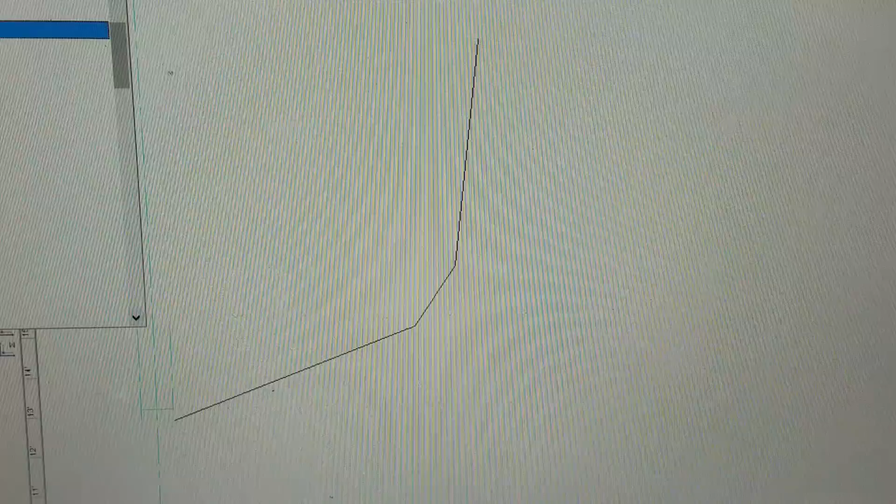That's the line that represents that frame that I built that was sort of out of position. Not out of plumb, but it just wasn't symmetrical and didn't give me the real dimensions I wanted. And so the dimension from here to here was off, which meant that that frame wouldn't sit right. The sheer would have been a little bit more in. There's only a 3-inch difference from the top of the sheer to the chine. So it's really important that I get this flare properly. So I wanted to show you frame 16.

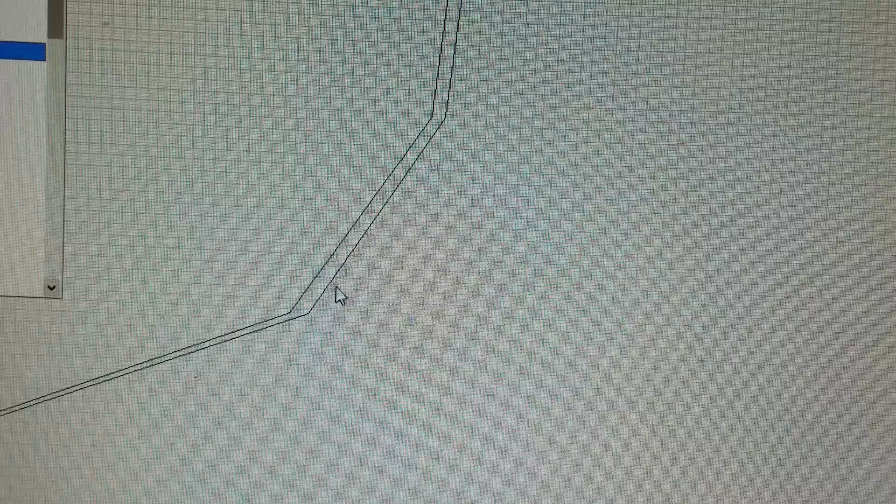All right. Now here is frame 17. You see, it is pretty similar, but it's different. And so it's longer here at the bottom of the boat. The angle is pretty similar, but it's a little different. And I wanted to show you that in a graphic way.

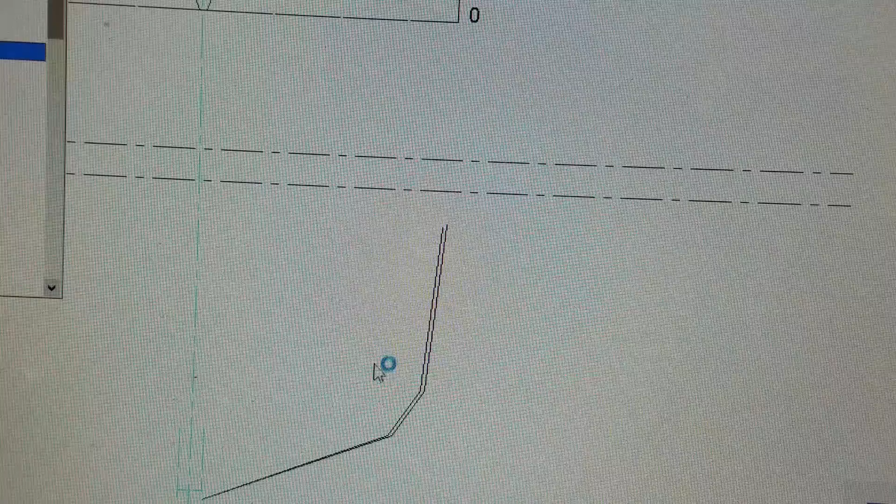It actually is taller, if you can see that here. Let me zoom out and zoom back in. It actually rises up longer. It rises higher. So these are small changes, but it makes a big difference when it comes to the boat. And let's come back up and see, that's 17. And so here is 18.

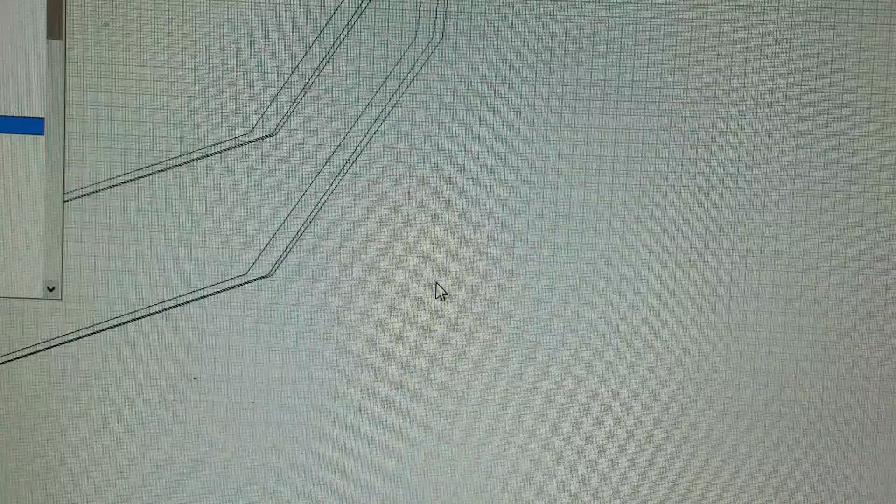All right. So 18, if you can see, even the difference again is a small difference, but it is different. Remember, all these frames are drawn on the same plane, which means that if they were the same, they would appear the same on these drawings. But as you see, ever so slightly, there are differences. The bottom of this frame is a little bit longer.

This dimension right now is equal, but even that changes later on down the line. And you can see this frame also is a little bit higher because the boat rises as you go to the back. And then if we look at frame 19, even a little bit more difference. Less difference because we're getting to the part of the boat where it's not getting very wide, right? But it's still getting taller. The frame's getting taller.

And then we're going to go ahead and jump, and I'm going to show you a big difference here. We're going to go to like frame 12. Frame 12 is not very far from frame 16, but there's a big difference in the way it looks, in its shape. So you see frame 12, it's even shorter here. This dimension, I believe, gets longer because at the forward end of the boat, the chine rises up out of the water. So if we fast forward again to, let's say, frame 10, and then let's go to frame 8

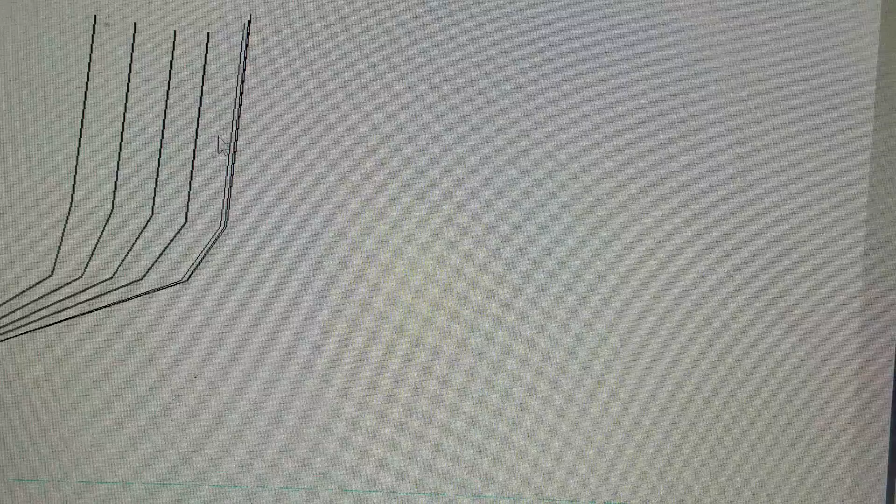and 6. So if you see, a jig really serves no purpose because not one of these frames is exactly the same. And remember, if they were the same, you would only see one line here. But they change in very subtle ways, which gives this boat amazing shape. I know it may appear to be a big old box, but this boat has flare to it.

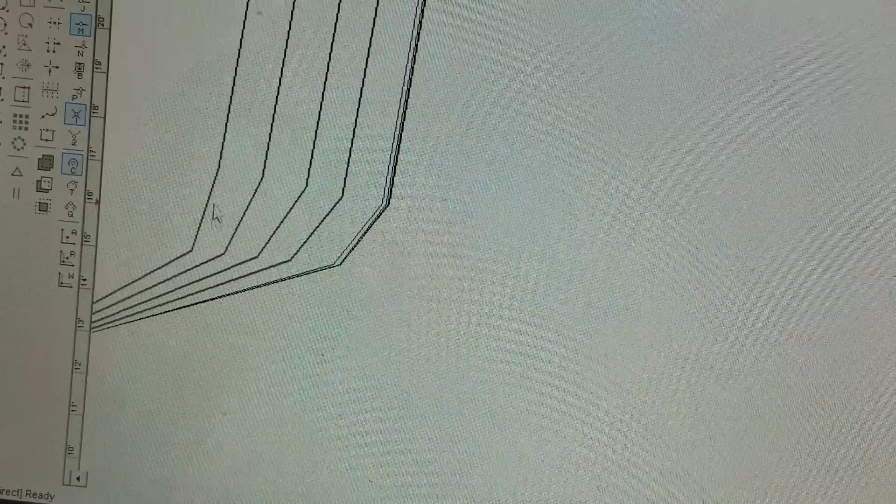It has lines. The chines rise up towards the front of the boat. They rise up again at the back of the boat. So it's got a pretty dynamic hull shape. It's not as simple as you may think. And it's ever so subtle, but it makes a big difference as it's moving through the water. So I just wanted to show you that in a quick response to the questions about building a jig.

I mean, if I built a jig, I would have to build a jig for each frame. All I need to do is to be able to lay these lines on the table, make sure that the wood lays on the line and glue it and screw it and nail it together. It's just that simple. It only took me about 20 minutes to do each of those frames last night, and that was checking, triple checking, and quadruple checking. So yeah, I think we've got that process of those frames down pretty well.

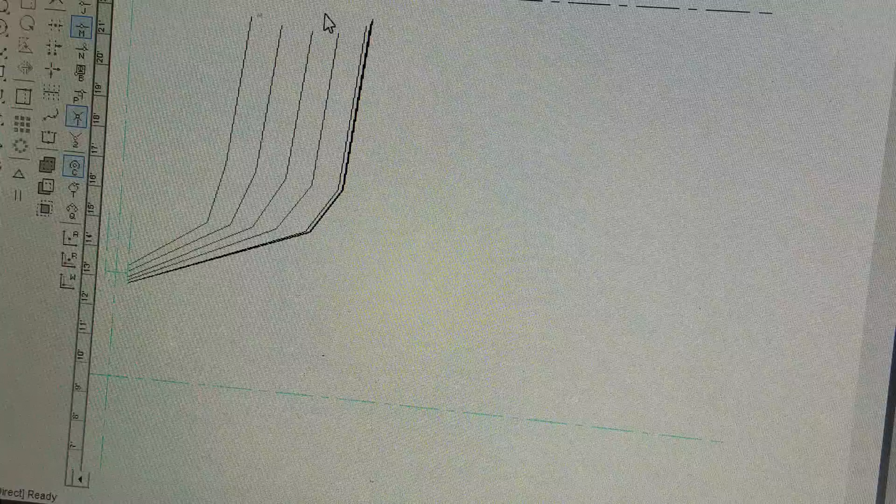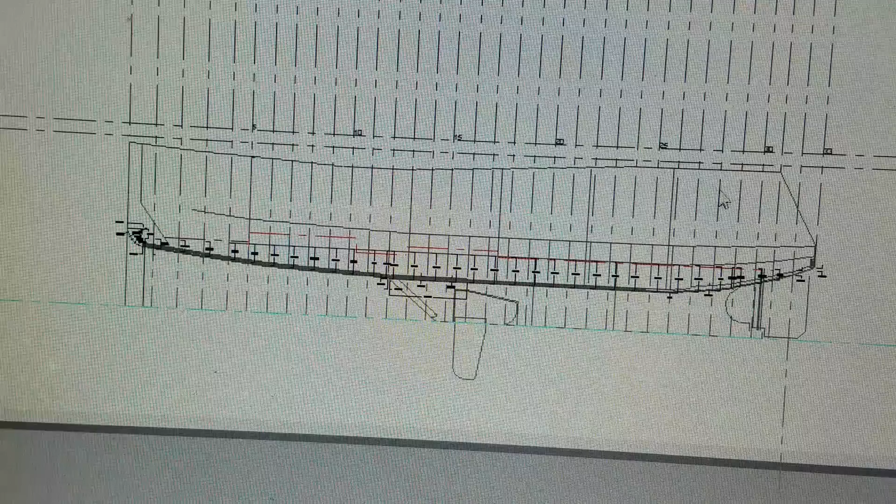You might not see it too well, but if you look at this elevation, you can see that the boat is high, then it gets lower, then it rises up again towards the aft part of the boat. So there's tremendous shape there, well, not tremendous, but there's shape there, and of course there's great shape when looking at it from a plan view.

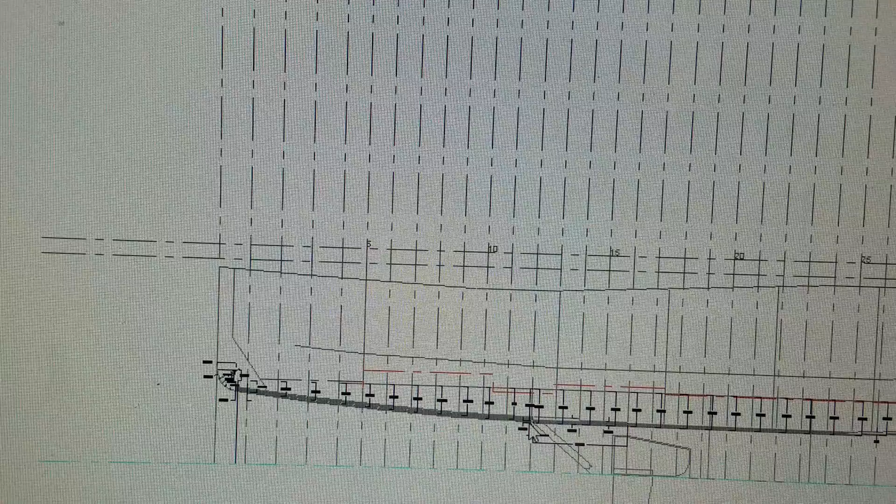So none of those frames are the same, and when I go to install these frames on the chine, I have to make sure that I have this elevation offset from the platform, and that's what I have to do more quality control with. So I need to go out and get a laser to spin a line to make sure I have that right.

So it's a good process, well, it's detailed, but I want to make sure I get all these steps right so that I can have this beautiful hull shape cruising through the water at some point. And believe me, it's going to be very, very nice.